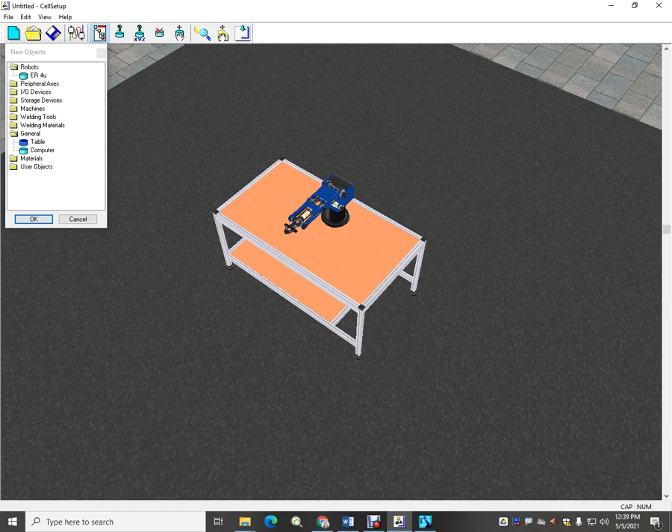And then you can use your drag object to pull it there. I always put it to the back center so that we have all this real estate up front to be able to put our other objects.

Today we're going to use a red and a blue cylinder. Let's use under material, let's grab the cylinder. We have a couple of choices with the cylinders, we can either lay it down horizontally or vertically. We'll leave it vertical. Here's our red, which defaults it. You can change the materials of the object, I typically don't. And then you want to leave this, because this is what it is in real life. Their diameter is 40 millimeters and the height is 40. Leave those. When you pick OK now, be sure that you mount it on the table.

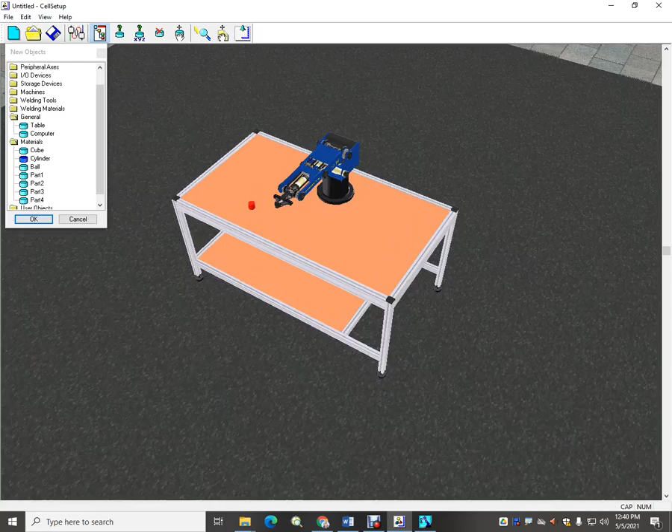And I recommend place it, go right away and place this immediately by double clicking on it. You can get the position, and we're asking you to put that position at 0, 400. And that'll place it to the right of the robot, because that Y was a positive number.

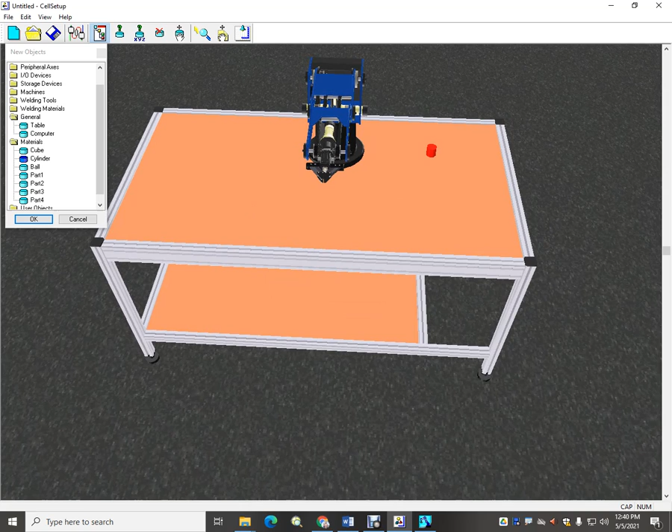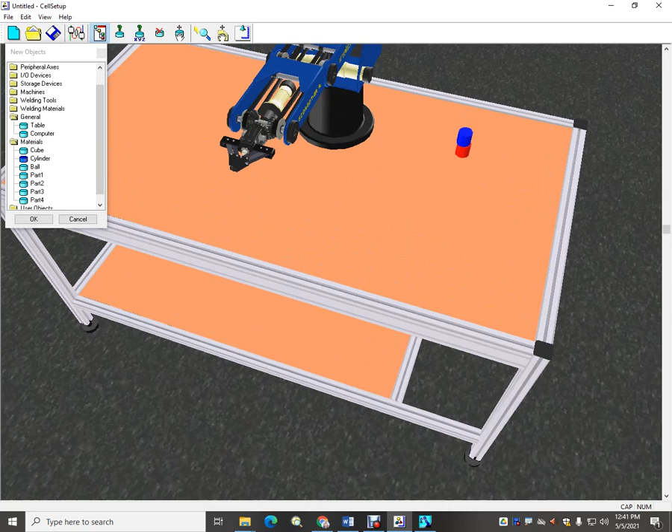Let's grab the blue one, leave that all the same. Now this is so very important that you zoom in and place the arrow right on top, and then click OK. That way you can stack it. Once you place it on the table, you cannot pick it up again to place it onto the cylinder. You must put it on right away, and it's going to be very close to the position you want: 0 and 400.

And that gets us ready to begin the first exercise. So that's all we need to do with this one. This concludes our cell setup for robot number 4.

I recommend then that you save it to the desktop, save as. That allows us to have easy access. Robot number 4. And then hit save.

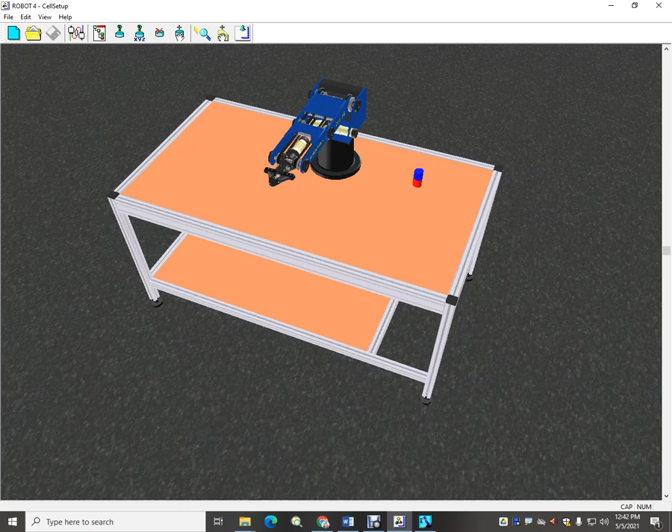Also a good idea to leave your cell setup open in case there is a mistake that we have to go back and look at it again. So you can open up the RoboCell immediately, and then import that file. So we want to start a new program, so File New.

Couple things you have to do here though before you get started. Remember that we are professionals and pick the Pro. By picking Pro, that allows us access to more options in our workspace, as well as it allows us to open up the teaching position so it can be expanded. One of the first things that I recommend is getting ourselves into the home position.

Let's get our robot simulator in here so that we can see it work. Let's import the 3D image, go to the desktop, and at the bottom of the list you'll have number 4. Let's grab that number 4. I always like to place it on this side because I don't spend a lot of time in the program flow area in these earlier exercises, so I can get that to do what it needs to.

Now I can see once I create my home position, our home position is position 99. And again, each exercise I hand you, you should remember, position 99 is listed at the bottom of the page where we have our robot programming handout.

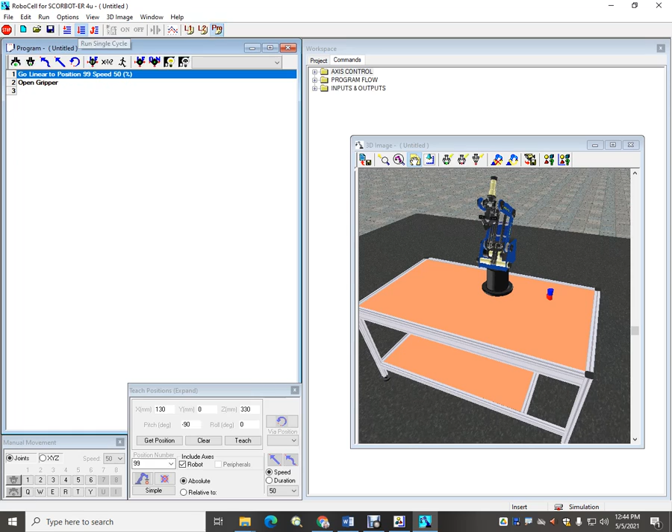You should see the robot move in our simulator and open up the grip. Again, let's just go back over some things. In the toolbar, you have single line, single cycle, and continuous that you could get the robot to move.

In the run menu, you have those same single line, single cycle, continuous, and the third way to get it is with the F keys, F6, 7, and 8, and our stop button is F9, or you can hit the big red stop button right there up in the corner. The other way to do that.

All right, so let's get down here and now teach positions. So in the diagram that I provided you, we have position 6 and 7 listed over here where the robot has its cubes. The red, I keep saying cubes, the cylinder, the red cylinder is position number 7.

So let's record that then. Add 7, and it is at 0. Y is 400. Z is 17.5. And the roll and the pitch will remain the same throughout the entire exercise. So hit teach.

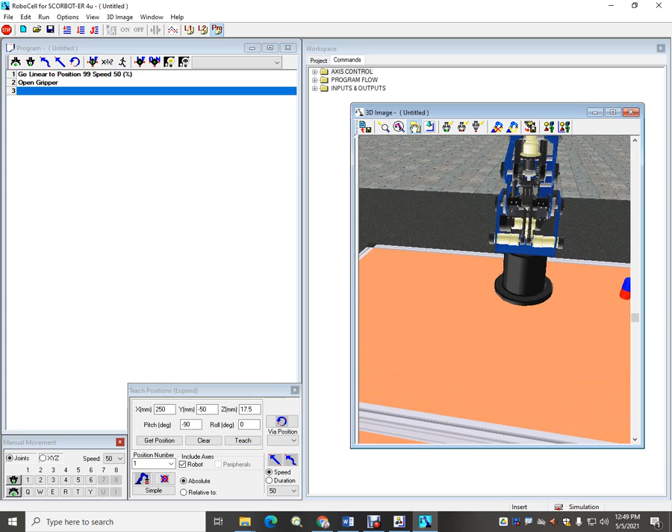Okay, so we've got them all listed. So let's just add them to the program, and let's move these cylinders. So the blue one is to move first, because it's the one at the top. Our gripper is already open. So let's go get the blue cube and let's move it. So the blue, over the blue is position 12. So let's get number 12 according to our diagram. Let's see if that works.

So a single line. Whoa, that's not where it is. I bet you I forgot to put the negative, so here's a good chance. Let's go ahead and look at position 12 and see what we did. 12. Let's get the numbers.

It's position 6 where we want it to go. So 6 and 16 are associated with each other. So 12 is not where we want to go right now. So we can just double click on that, and we can easily change those numbers. So that's not where we want to be. We want to be at 16. So there's no reason to erase this. You could just go ahead and put it in, now it'll switch itself to 16.

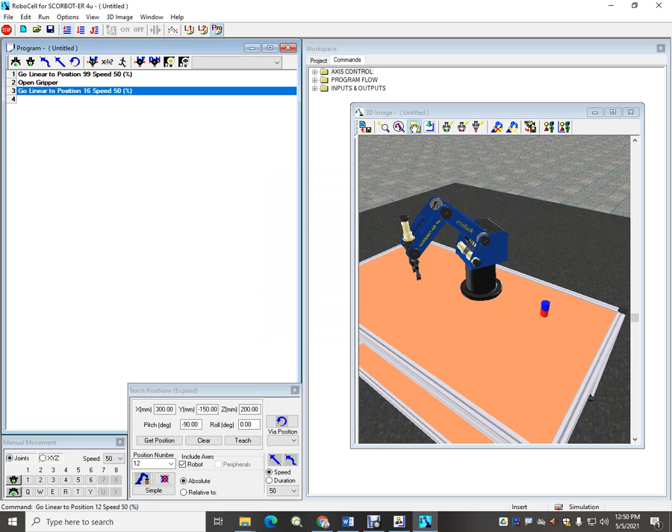Now let's see if that works. So single line, let's see where it goes down. Well, look at that. It went where we wanted to go.

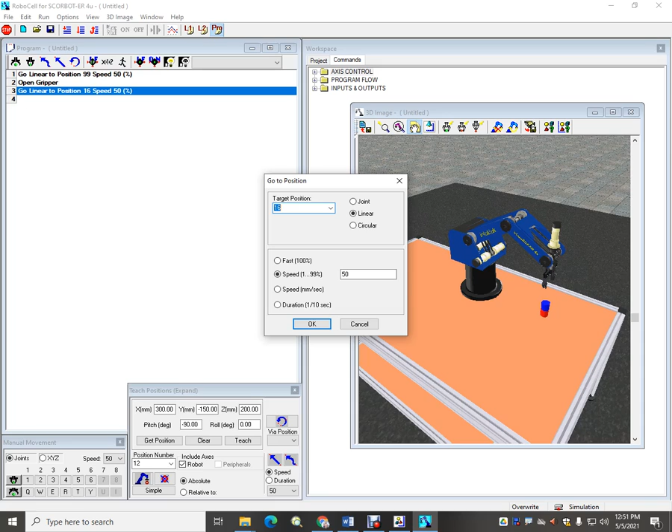Now we could have just cut it. If you select that line and then you right click on it, you get a number of lines that you can use. You can find, add a remark. These are quick commands. If you select cut, it'll erase that. So there was no reason to cut it. If I just double click on it, then I get the series of numbers that I can just change, and then add, re-add the number, and then it automatically switches.

So if you want to take it out, right click on it and cut. You can also put the blue line on there and hit the delete button. It'll do the same thing. So now let's go get the blue cube, and that was position 6.

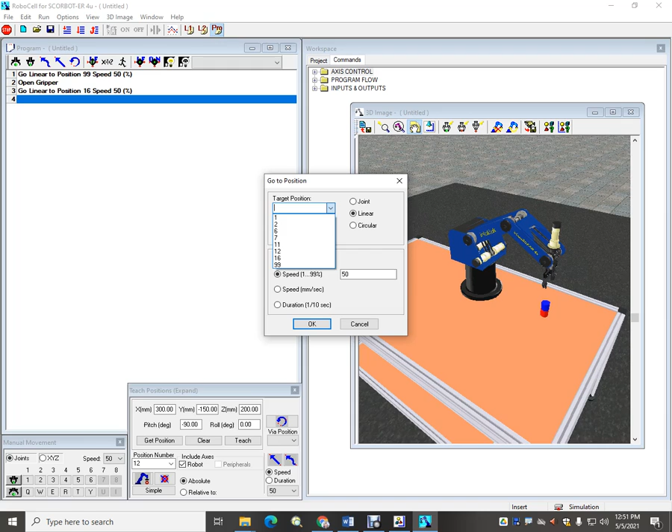I usually just use the go linear. So position 6 then, she was a single line, and that was over the top. Remember, if you don't close the grip, that cube's not going anywhere. And again, as I said before, we always want to go straight up and down.

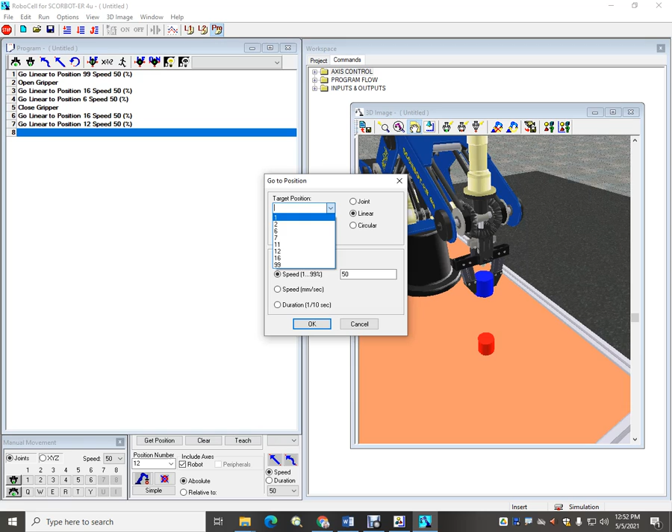So let's add our position 16. Let's do that single line up and over. All right, so look at the diagram. It's saying that the blue cube is going to position 12 and then 2. So let's add 12. 12 puts it above the table. Position 2 puts it at the table. Let's do those two. Let's run single cycle now.

Well, there it is. Sweet. All right, we got to leave it there. We can't leave it there if we don't open the grip. Open the grip. Now, if we try to take off right now and grab the red cube, we'll bang into the blue one. So we want to get back up over the top.

So over the top of that one was our position 12. So let's back it out. Get back to 12. Run a single line. Yep. Oh, that's a beauty.

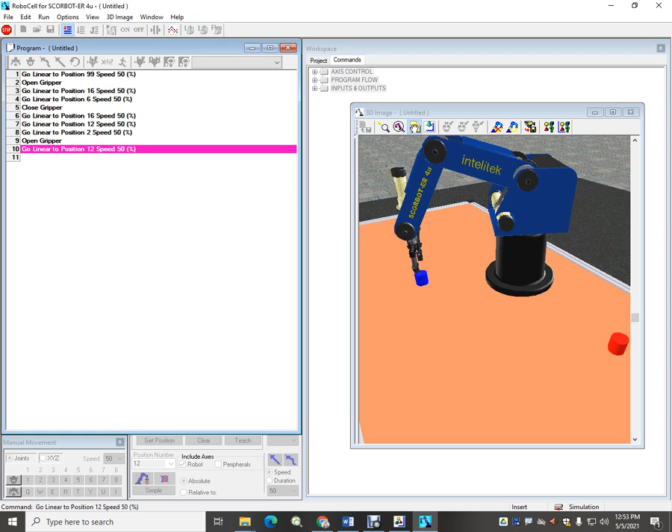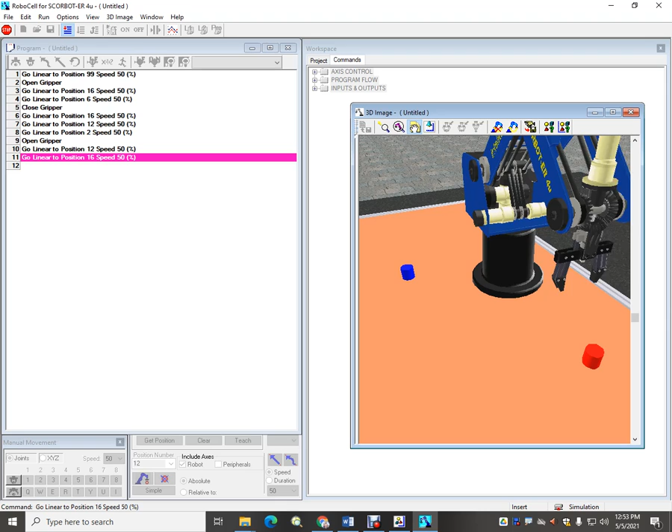Now let's go get the red cube. So to get over the top, we said that we want to move to 16, gets us over the top of that stack. Let's see if that works. One at a time, that should get over the red cube. Our red cube is position number 7. Let's add 7 to the list.

Always go linear. If you use any other choices, then the robot will try to take its own pathway there, which is not always maybe such a good idea. The robot is definitely not as smart as you are.

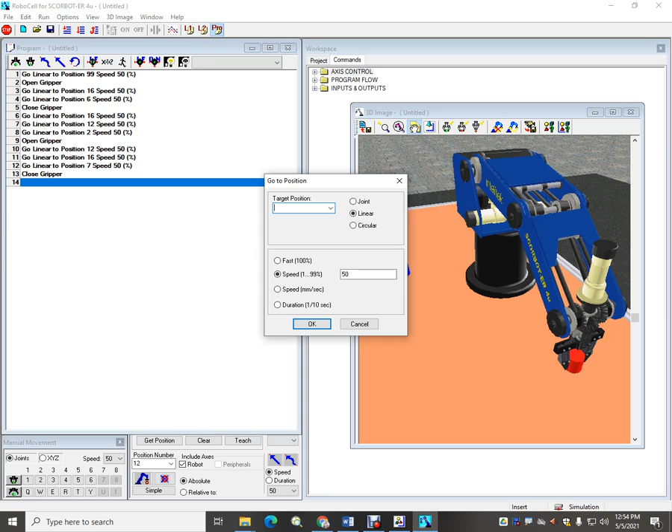All right, close the grip. We're not going anywhere if you don't close the grip. And now we can take it to the new position. Again, safety first, always try to go in and out of the cell, straight up and down. Gives you a lot more accuracy too, because you're really only changing one number, and that would be the Z position.

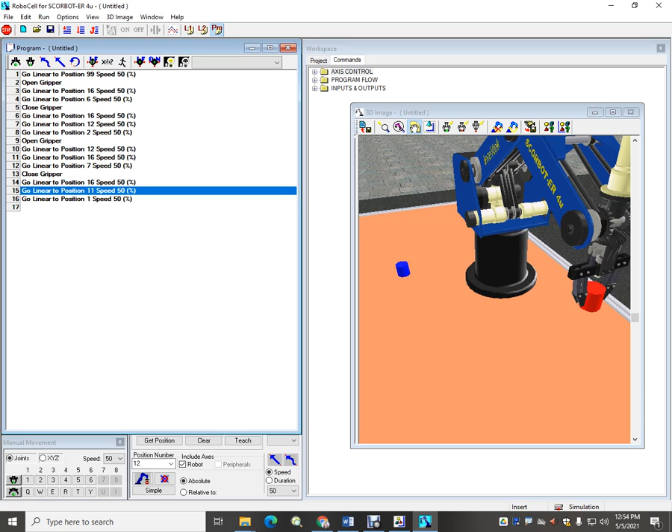Now the blue one, nope, red. 11 and 1. So let's go to 11, to the 1. Let's watch that happen. 11 and 1. That should be 250, negative 50. There you have it. Make sure we leave it there.

We want to open the grip. Let's watch that happen. Single line. Oop, what did I do? I put close grip. All right, right click and cut. There we go, open grip. Yeah, it looks better.

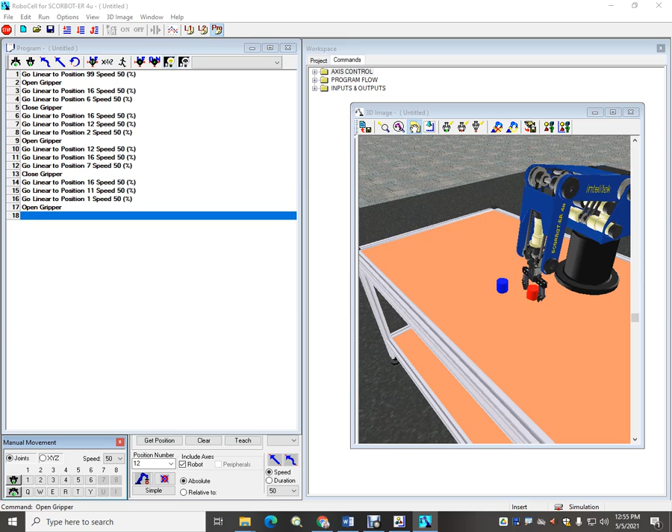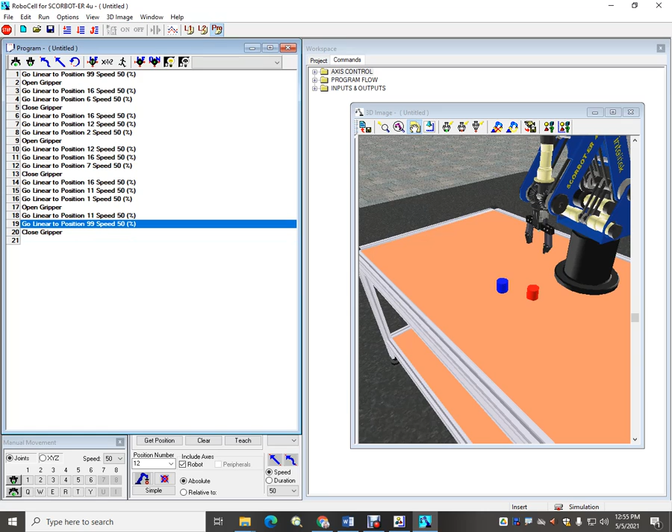Safety first, in and out of the cell. Let's go back to position 11. See that move up? And then we can go home. Our home position is number 99. I always recommend that we go back to this position. Just good housekeeping. And if you're using the real robot, allows me to put the bag on it and then just close the grip. So let's go back to the single cycle, get it to that position. Boom.

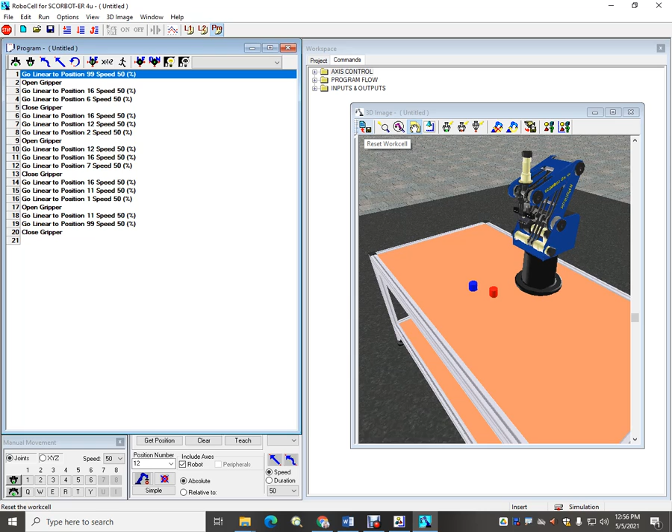All right, let's put the blue line at the top. Now remember, when we look at the 3D image, in the upper left-hand corner is the button to reset the cell, gets us back to the beginning, and this will allow us then to move it from the beginning, resets it. So let's watch it run all the way through. Let's do a single cycle.

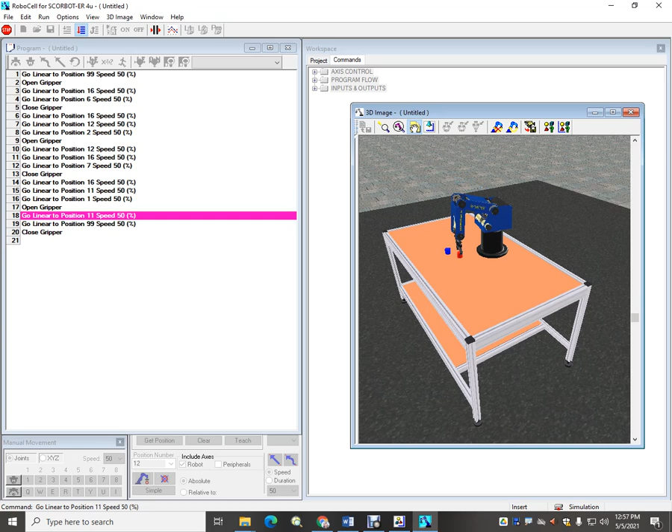Well, there you have it, ladies and gentlemen. That's robot number 4.

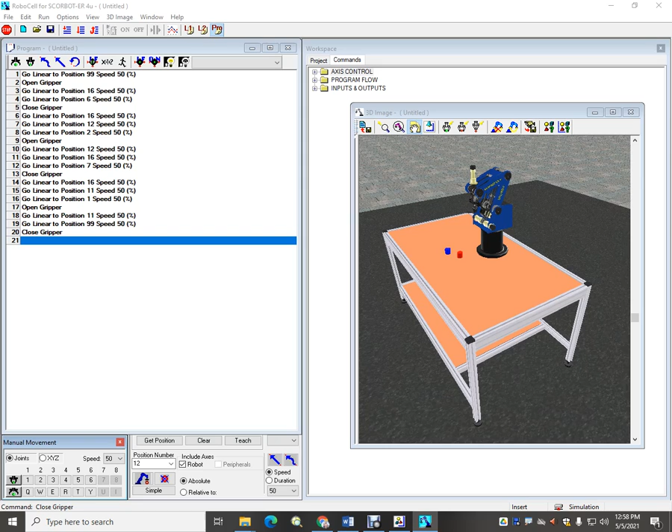To finish this off, to get credit for your work, be sure under program flow, you go RE for remark. Make sure you put your name. Add that to the list. Remember that remark does not interfere with the operation of the robot, but it does give you credit so that you have your name written right into the program. It keeps the evildoers from printing your program and signing their name and trying to turn in your work.

Put the blue line at the top, go to File, and you notice then that with that at the top, you will have the option now of printing the program and then sending it to the printer wherever you're at. Hopefully this is the one in my room or in wherever you're at as you're working on it, and then hit the OK button, and then it'll print up only the program itself. So pick OK, and it'll send it off to the printer.